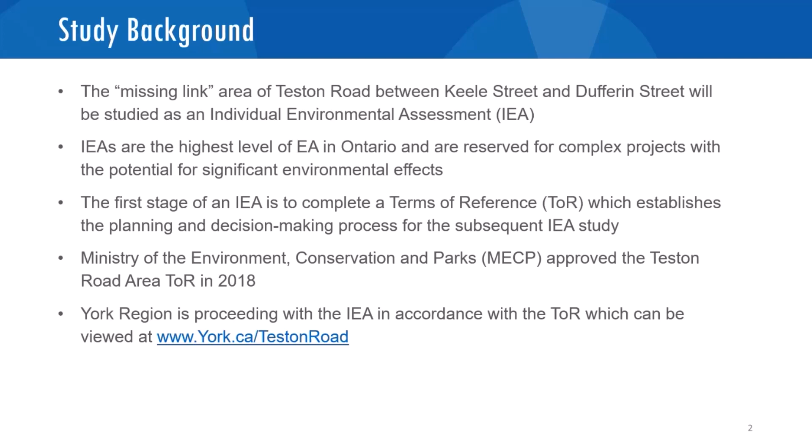During the terms of reference stage, the following problem and opportunity statement was identified for the project: to improve the efficiency, safety, and continuity of the transportation network within the Teston Road area.

This map shows the study area with satellite imagery. The study area is outlined in blue. Much of the southern portion of the study area is already developed as low-rise residential housing and commercial buildings. Central to the study area is the closed Keele Valley landfill, the closed Vaughan Township landfill, a closed private landfill, the North Maple Regional Park, and the Don River East Branch. The study area also has several golf courses and some agricultural land.

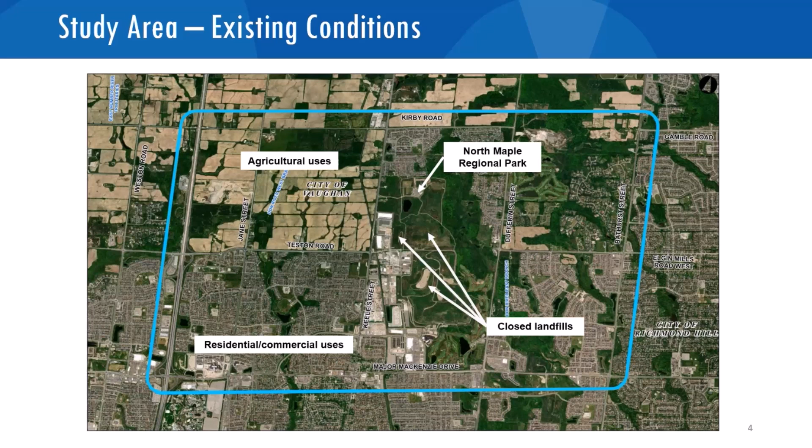During an environmental assessment conducted under the Ontario Environmental Assessment Act, two types of alternatives are examined: alternatives to the undertaking and alternative methods. Alternatives to the undertaking are functionally different ways of addressing the problems and opportunities, while alternative methods are different ways of implementing the selected alternative to the undertaking. The first open house presented the alternatives to the undertaking, and the second open house presented various alternative methods such as corridors and alignments for the preferred alternative to the undertaking recommended at the first open house.

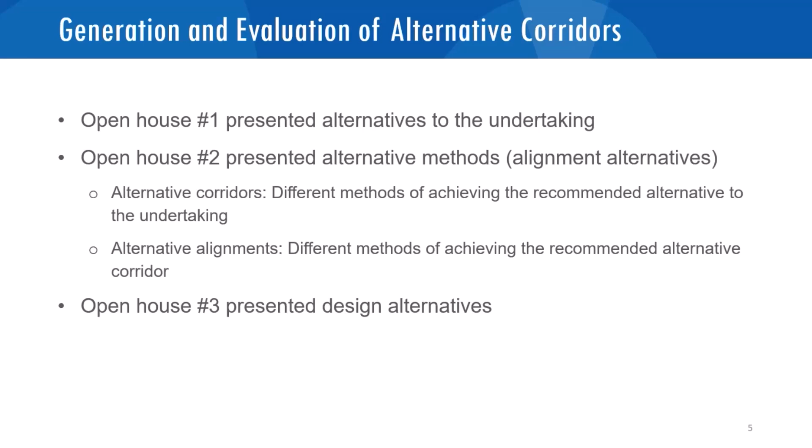During the third open house, additional alternative methods or design alternatives for the four sections of the project were presented. The fourth open house presents the recommended preliminary design of the alternative methods for the four sections of the project, as well as potential impacts and mitigation measures.

During the first open house, several alternatives to the undertaking to address the missing link area of Teston Road between Keele Street and Dufferin Street were presented. The assessment led to Alternative 4 being carried forward. Alternative 4 was a new 4-lane Teston Road connection between Keele Street and Dufferin Street with active transportation and the potential for transit service. The preferred alternative provided the basis for subsequent stages of this study.

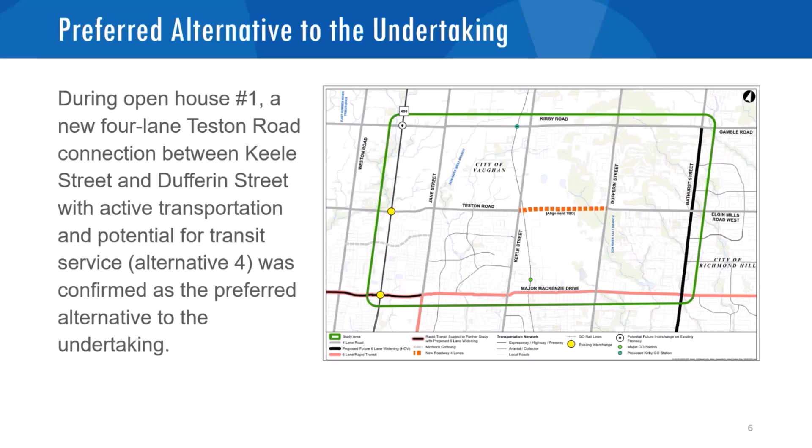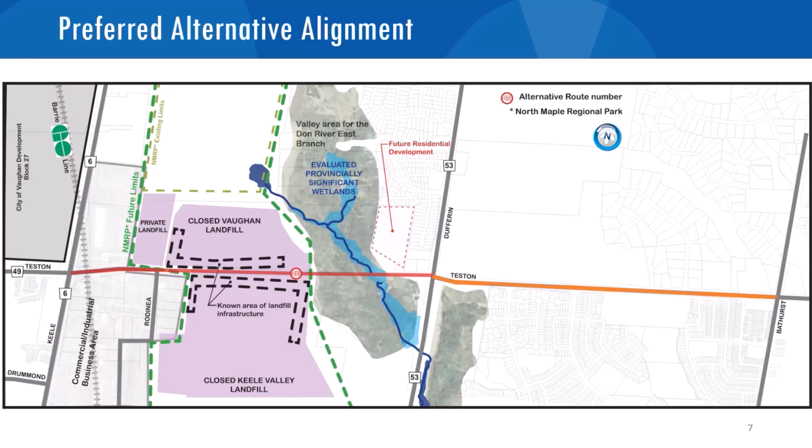Following the second open house and having confirmed a preferred alternative alignment that is shown here, including the widening of Teston Road between Dufferin Street and Bathurst Street, the study team began the process of generating alternative designs for the various components of the project.

The next step in the process was to generate design alternatives for the various components of the project. The study team identified 4 distinct project sections, each with its own unique design challenges that would require solutions. The 4 sections are broken down here and shown on the map.

Section 1 includes the Keele Street and Teston Road intersection easterly to Rodinea Road. This section includes the GO Rail crossing and a closed private landfill. Section 2 is the area of the road that would pass between the Vaughan and Keele Valley landfills. Section 3 includes the Don River tributary valley crossing, and Section 4 is the existing 2-lane section of Teston Road between Dufferin Street and Bathurst Street.

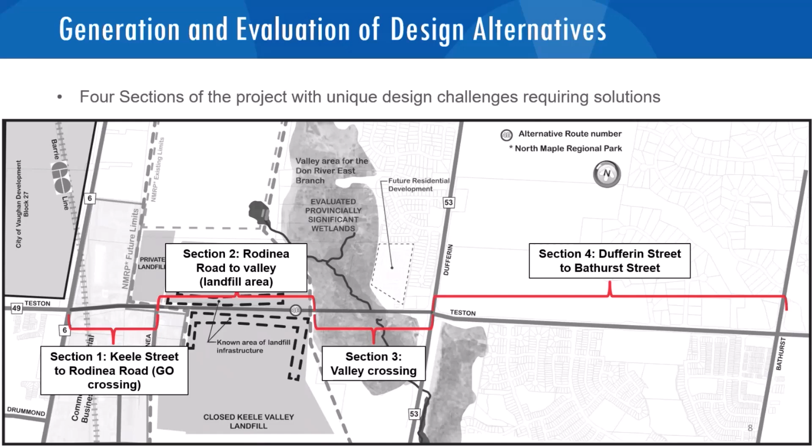This slide shows the recommended full-width Teston Road cross-section, which includes a 4-lane roadway, sidewalks, cycle tracks, and boulevards within a 36-meter right-of-way in accordance with York Region standards.

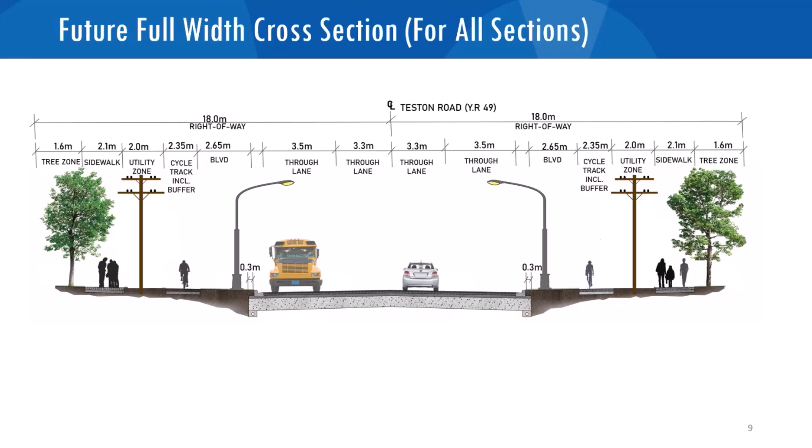Somewhat reduced width cross-sections are being recommended, at least as an interim condition, for constrained or more narrow sections of the project. The design alternatives for Section 1 include options for designing the road at the same level as the

GO rail crossing, the recommended alternative, as well as for a potential future grade separation where the road goes over the GO rail crossing. Road-under-rail options were screened out, as these would be more costly, more difficult to construct and maintain, and would be more disruptive to rail service during construction than the at-grade option.

All the potential future GO rail grade separation alternatives generated for this section are road-over-rail options. Along with the future do-nothing alternative, there were 4 alternatives generated for this section for a grade-separated GO rail crossing. Section 1, Alternative 1, includes a GO rail overpass and keeps both Keele Street and Teston Road on their existing alignments.

Section 1, Alternative 2, includes a GO rail overpass and shifts Teston Road slightly to the north from its current alignment while keeping Keele Street the same.

Section 1, Alternative 3, includes a GO rail overpass and shifts Keele Street westerly while maintaining the existing Teston Road alignment. Section 1, Alternative 4, includes a GO rail overpass and shifts Keele Street westerly and Teston Road northerly.

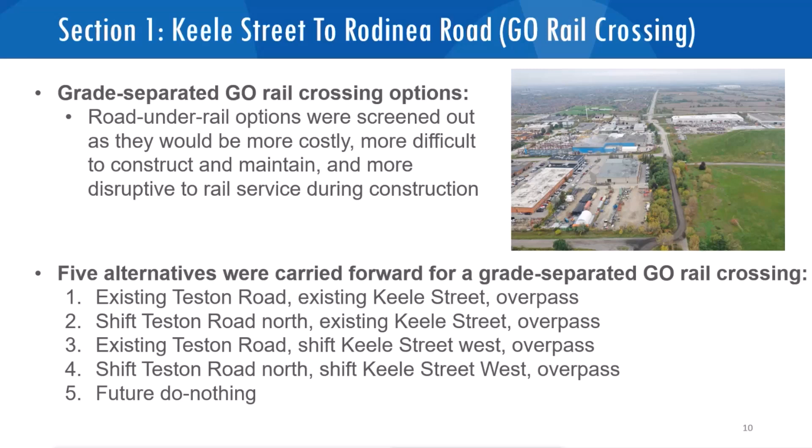Section 1 features several industrial uses such as shipping and receiving warehouses and manufacturers, as well as the Barrie GO line, which passes vertically through Teston Road.

In the interim, York Region will proceed with an at-grade GO rail crossing with an improved Teston Road alignment, shifting the road to the north.

Proceeding now with an at-grade crossing will have no impacts on property, and all accesses can be maintained. The IEA is also recommending the long-term property protection for a grade-separated GO rail crossing.

For the future grade separation, Alternative 2 would be carried forward for implementation. This is because this alternative would perform well from a transportation perspective while also having less impacts on property, development areas, and the recreational facility in the southwest.

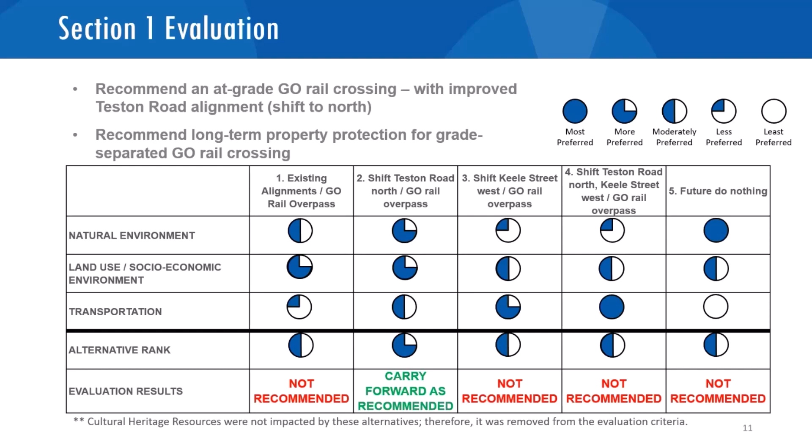Section 1, Alternative 2 is presented here as the recommended long-term solution for this section. This alternative will shift Teston Road slightly to the north from its current alignment while keeping Keele Street the same. The GO rail overpass will be implemented in the future.

This alternative has a relatively small construction footprint and removes the reverse curve. However, several driveways for the nearby commercial properties will be impacted.

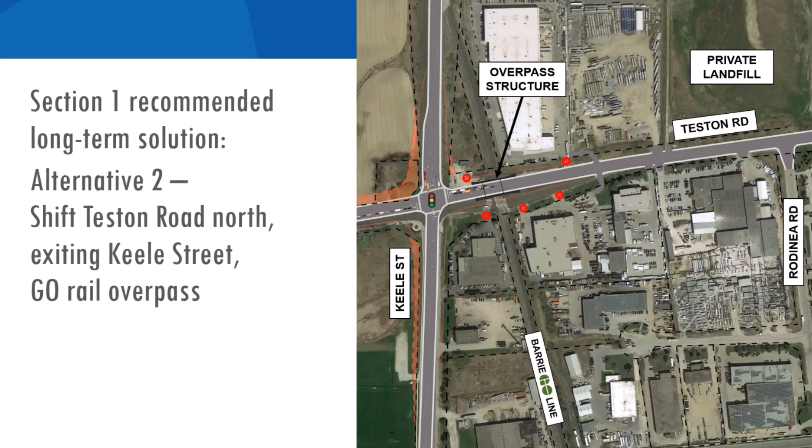Section 2 is the section of road that passes between the Vaughan Township landfill to the north and the Keele Valley landfill to the south, from Rodinea Road to the west side of the valley area. The private landfill is also present on the western portion of this section.

Given the extensive landfill monitoring infrastructure present throughout the area, 2 basic roadway cross-sections were considered. The first is a full-width section that is the standard design for new roads within York Region. The second is a smaller cross-section that will allow the roadway to pass between the landfills and avoid significant impacts to the landfills to the north and south.

Section 2 contains a couple of industrial structures and passes between the Vaughan Township and Keele Valley landfills. This area is part of a planned expansion of the North Maple Regional Park.

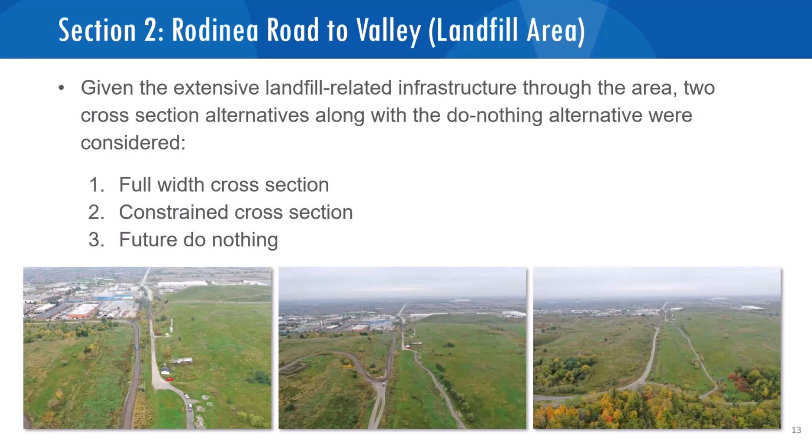The northwestern portion contains the private landfill and associated access road. Directly north, the Vaughan Township landfill includes several well monitoring sites in addition to an access road and additional infrastructure.

To the south, there is an industrial property just east of Rodinea Road, as well as the Keele Valley landfill, which contains monitoring wells similar to the Vaughan landfill in addition to access roads. There is a large difference in elevation between the north and south landfills.

The road is proposed to be built on top of the narrow strip of raised land, adding to the justification for the constrained cross-section. Due to the limitations in this section, the constrained road cross-section was recommended with long-term protection for a full-width cross-section. Details on recommendations for active transportation, including pedestrians and cyclists, are provided in the next presentation.

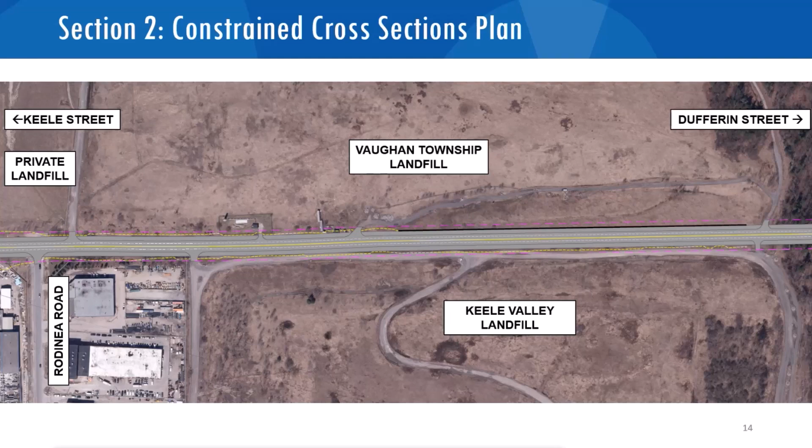Section 3 pertains to the crossing of the valley from east of the landfills across to the Teston Road and Dufferin Street intersection. This section considered 4 alternatives, including a single-span, double-span, and triple-span bridges, along with the do-nothing alternative.

Section 3 crosses through the valley lands, which consists of forested communities from the end of the landfills to the residential areas at Dufferin Street.

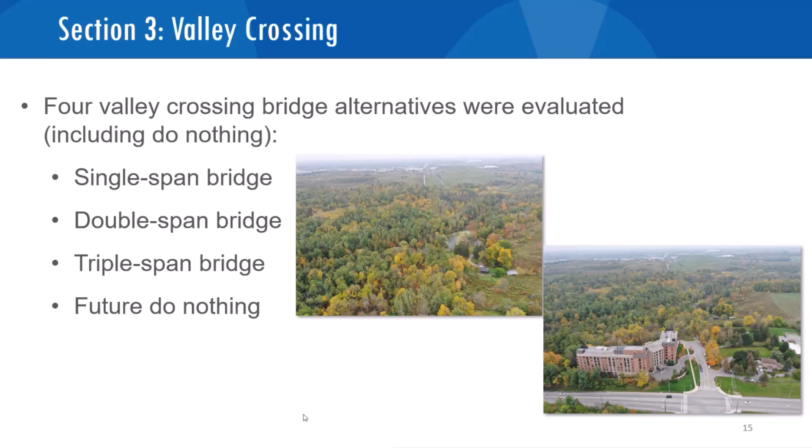Upon evaluation of the various bridge alternatives along with the do-nothing alternative, the single-span bridge was recommended. While all bridge alternatives will have impacts to the valley from both temporary construction impacts and permanent impacts, the shorter structure is relatively simple to construct and less expensive.

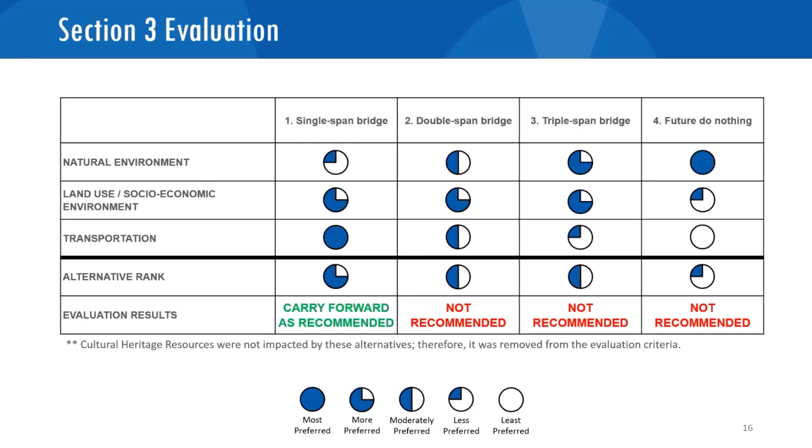Beyond the footprint of the bridge, the remainder of the valley crossing includes embankments along the length. The design for this section of the project will include integration of public amenities such as existing or planned trails, parks or natural areas, and will ensure a context-sensitive and sustainable design solution.

It will also include revegetation of the embankments, and additional investigations will be undertaken to limit the extent of the embankments where feasible.

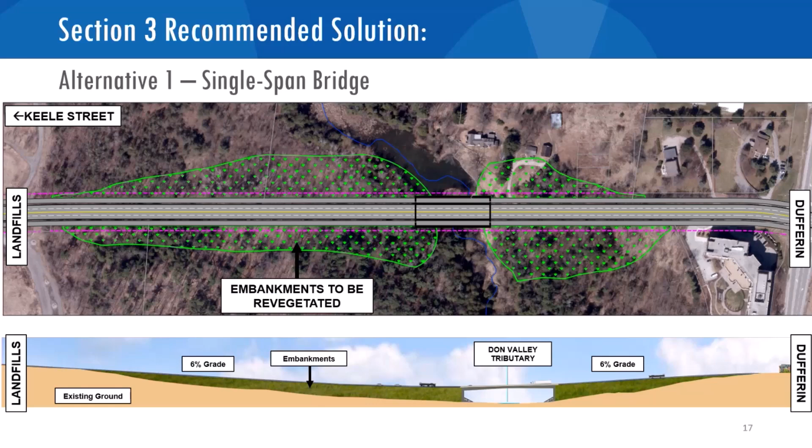This IEA is also proposing the widening of Teston Road to 4 lanes between Dufferin Street and Bathurst Street. Widening alternatives include widening equally on each side of the existing road, widen on the south side only, widen on the north side only, and future do nothing, keeping the road as 2 lanes.

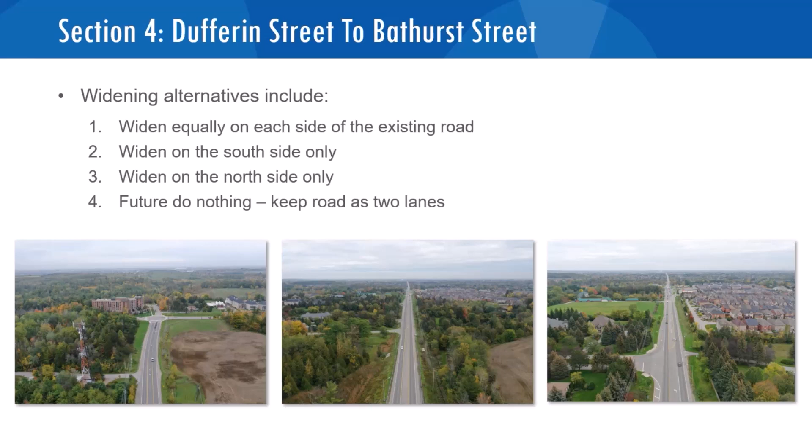Section 4 consists of open fields, forests, commercial uses, and several residential neighborhoods. Widening on both sides of the existing road is the recommended alternative for Section 4. This is because it has the least environmental and socio-economic impacts while also performing the best from a transportation perspective.

It is more complex to construct, but this is largely a temporary condition and will require construction staging to be designed to reduce impacts to users.

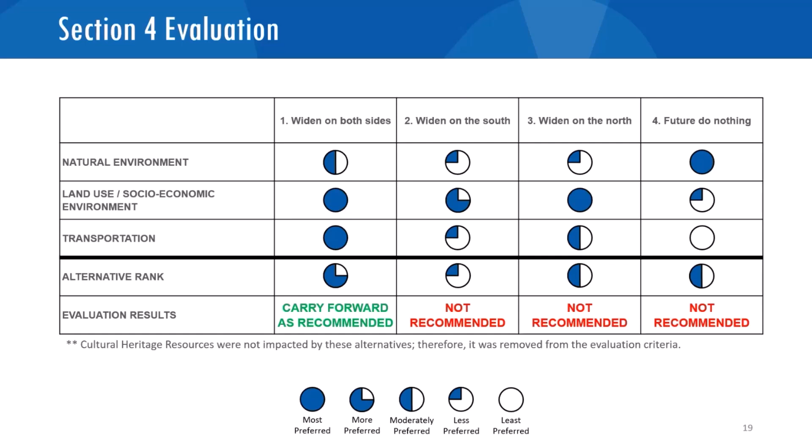Widening equally on both sides of the existing road would require the addition of approximately 2 meters on each side of the roadway. This minimizes grading impacts on both the north and south side of Teston Road. It also avoids impacts to the existing hydro poles and avoids the need to extend an existing culvert located just west of Saul Court.

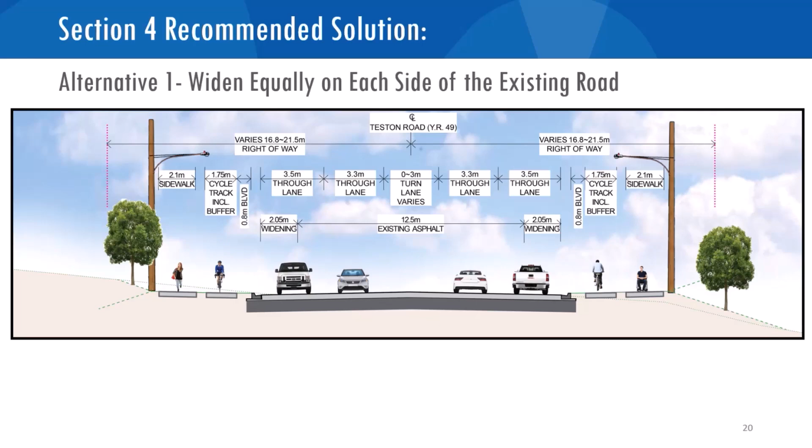In summary, based on the work completed previously, the study team has proceeded with a preliminary design of the recommended alternatives for each section. This includes an at-grade crossing with an improved alignment of Teston Road in Section 1, along with long-term property protection for grade separation, use of the constrained cross-section in Section 2 to avoid the landfill infrastructure.

And for reasons of continuity for Section 1 and 3 as well, use of the full-width cross-section within Section 4, and protection for a full-width cross-section elsewhere, a single-span bridge structure with span length for Section 3, and widening of the existing Teston Road equally on both sides from Dufferin to Bathurst.

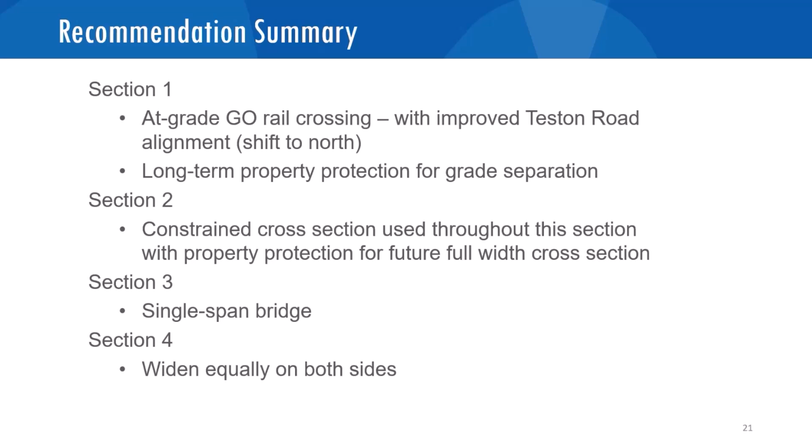In general, comments received were supportive of the progress to date, evaluation process, and recommended alternatives as presented at the 3rd open house. Significant topics of concern were surrounding area transportation issues, environmental impacts, noise generated from the new road, and the speed of the environmental assessment, design, and construction process.

Participants in the 4th open house will have the opportunity to participate in a survey and provide feedback. Details can be found in the main presentation.